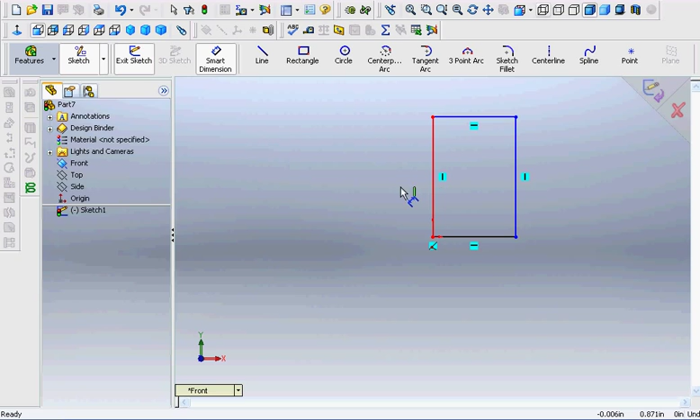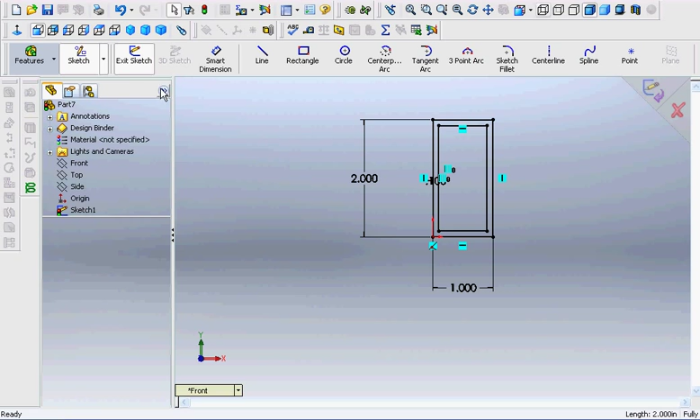Let's start off with our first piece of tubing. Go to the new part template, and extrude a rectangle off the front plane. Our tubing is always 2 by 1, so dimension that as 2 by 1. Since it's hollow, you're going to want to offset that. Go to the arrow on the right side and press offset. It automatically goes to the outside, so to make it go inside, go to the left here and press reverse, and check that.

Exit the sketch now, and make that 10 inches. And there you go, there's your first part, in 1 minute and 9 seconds.

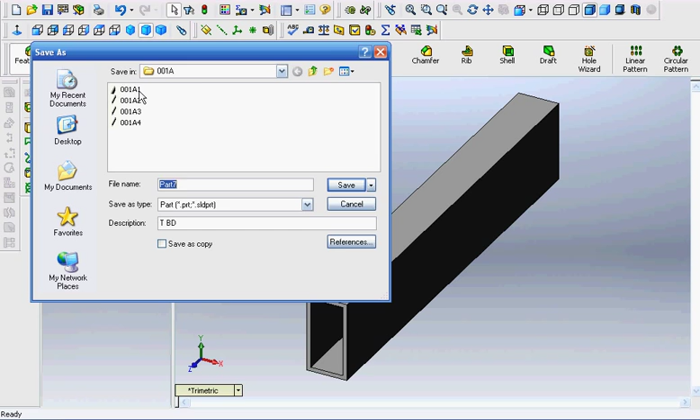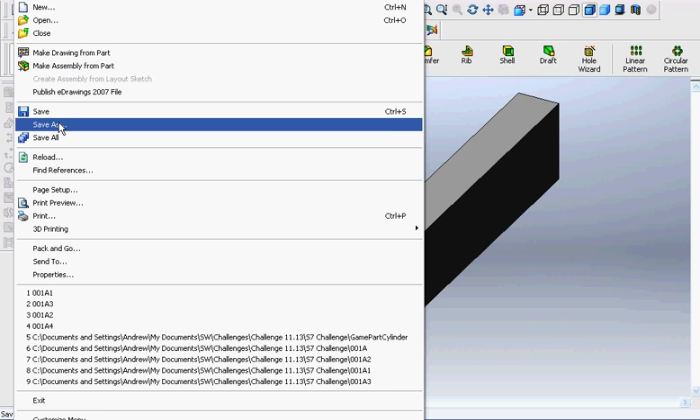So you want to save this - I've already done this, so they're all right here - but save this as 001A1. To be efficient, you would normally save it as one part and assemble the same part 4 times in the assembly because they're all equal, but you don't want to do that. An important thing to know is that if you have more than one part in the assembly saved to the same part file, if you edit any one of those parts, it'll apply to all of them.

So that means you want to save them as 4 separate parts to avoid that. So it's part 2, and then save all 4 of those parts. Open up a new assembly, and insert your first component here.

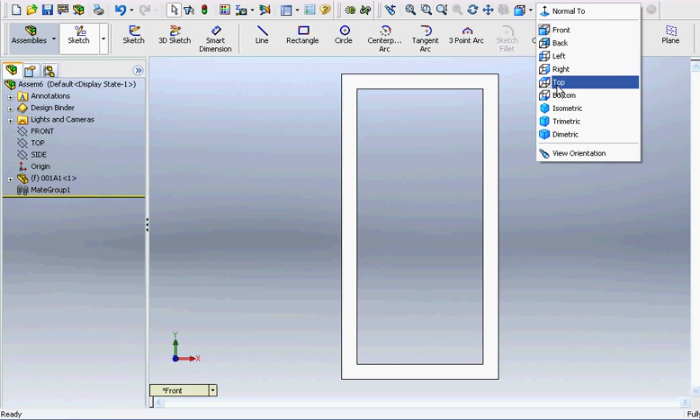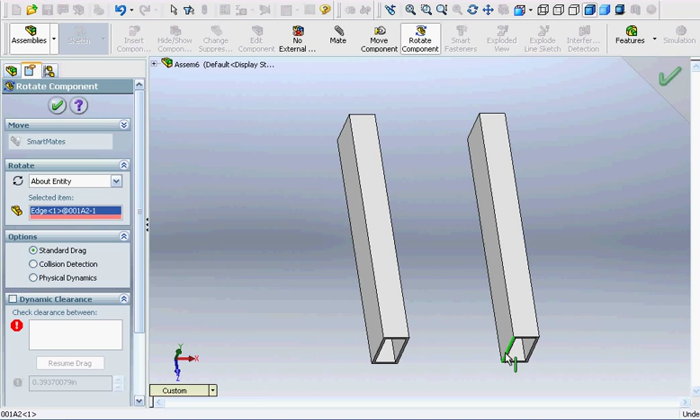Insert it, then go over to your top view. I guess we'll just go clockwise, so insert your second component right here, and this one has to be horizontal. Go to assemblies and then rotate component. Use the arrow keys to get to a good edge here, and rotate about an entity here. Just get it slightly perpendicular, then go back to your top view - you can just drag this over.

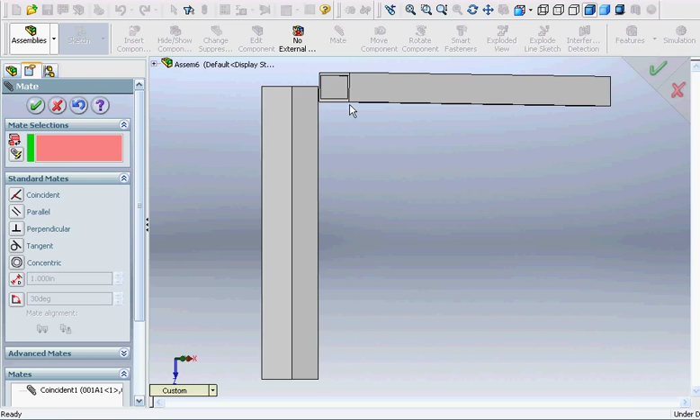Remember from our first real tutorial that there are 3 mates whenever you want to connect a part, and always use the faces, not the edges. So here's our first mate here, our second mate can go right here, like this, and finally our third mate right here.

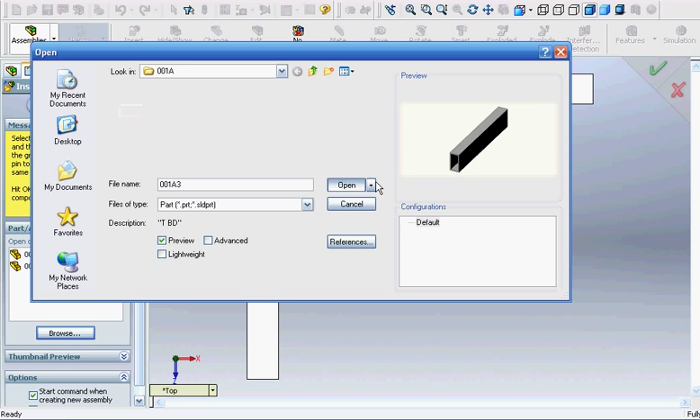Alright, so there's your first part in there. You can just go on and add another part - let's do 001A3. Same thing: first mate here, then second mate here, and third mate here.

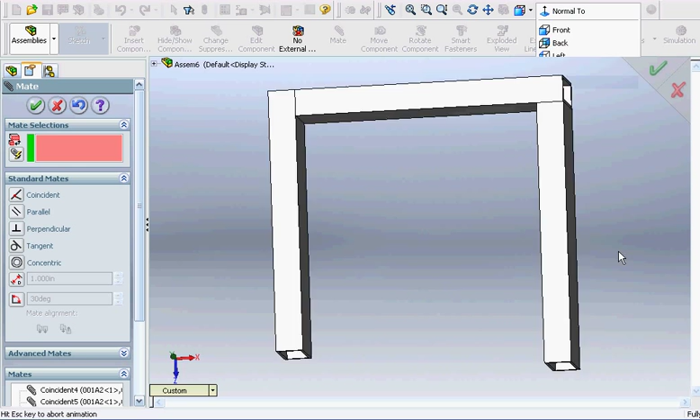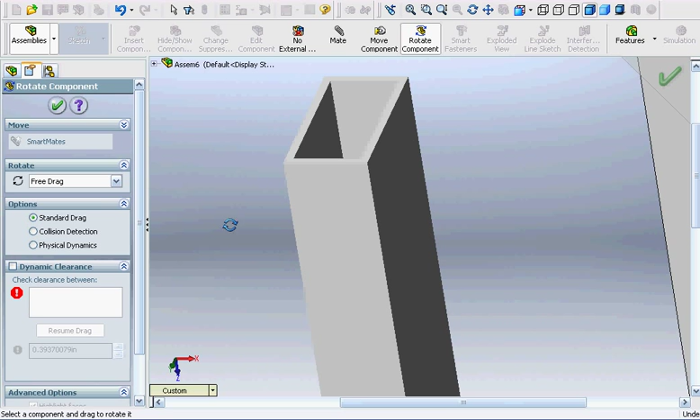Okay, so we'll do the third one right here. You want to rotate this again. Whoops, sorry about that, kind of messed up. Alright, that should be okay. Rotate a little bit more, just move it close to position.

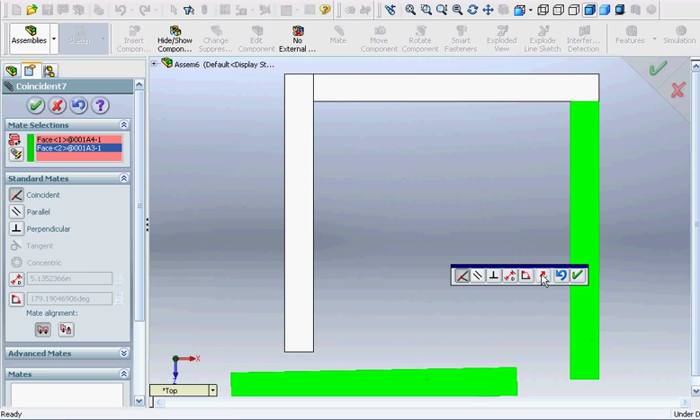Then go back to your top view. So first mate here, then second mate here, then your final mate right here, and we should be done with the part.

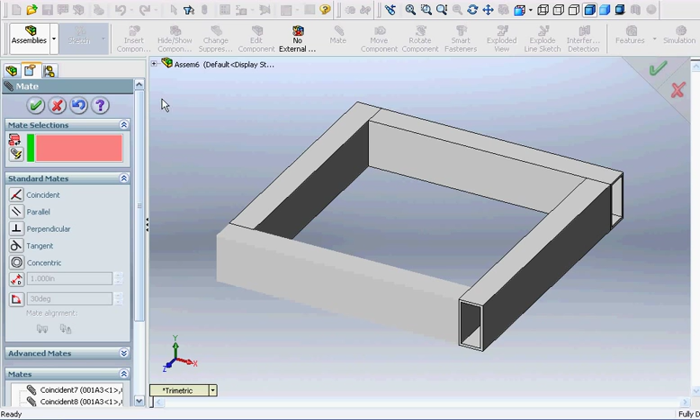Yes, you can just make it match my view here. And if you're wondering, this piece right here is a little bit funky because I think I selected it from a different menu or something, but it doesn't matter. So here you go, here's your first part.